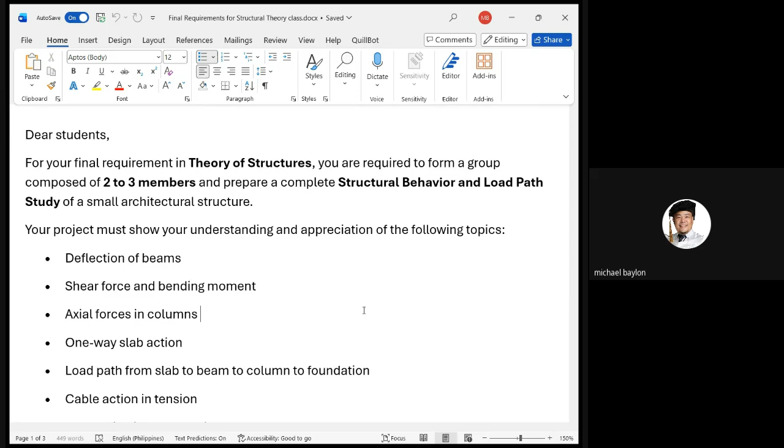Deflection of beams - we already have a formula on that, just substitute values there. Shear force and bending moment, axial forces in columns. By the way, shear force and bending moment are for the beams. The one-way slab action discussed to you in person. The load path from slab to beam to column to foundation, cable action in tension, and arch action in compression.

We will also cover the relationship between architectural form and structural behavior. You may propose a small pavilion, cafe, kiosk, gallery, waiting shed, covered walkway, small classroom, or any similar architectural structure.

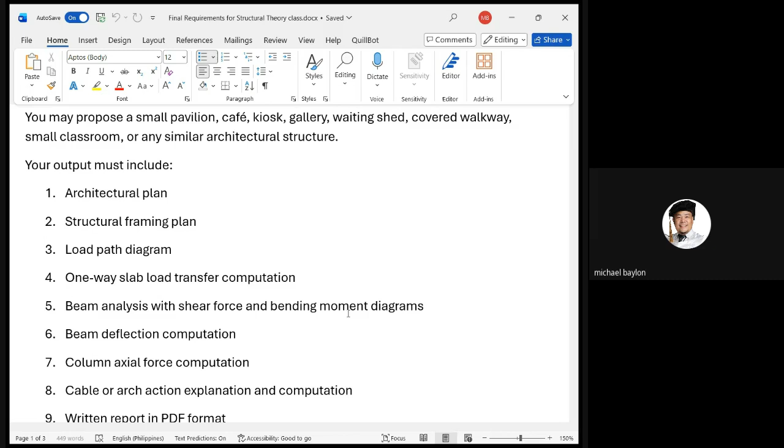Your output must include architectural plan, structural framing plan, the load path diagram, one-way slab load transfer computation, beam analysis with shear and bending moment diagrams, beam deflection computation, column axial force computation, cable or arch action explanation computation, written report in PDF format, and presentation slides for oral examination.

So the minimum would be 2 weeks to complete this requirement. That would be the minimum. If given a chance that you cannot finish that within 2 weeks, I can extend it. I asked the first class when will be the last day of their second semester. They told me it should be the first or second week of June. So you still have enough time.

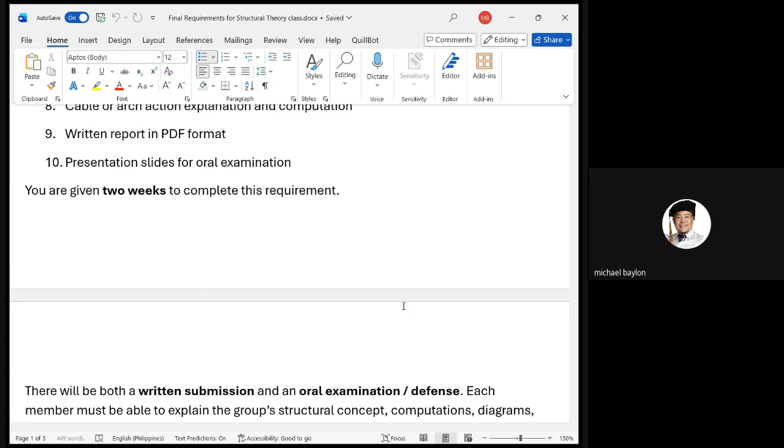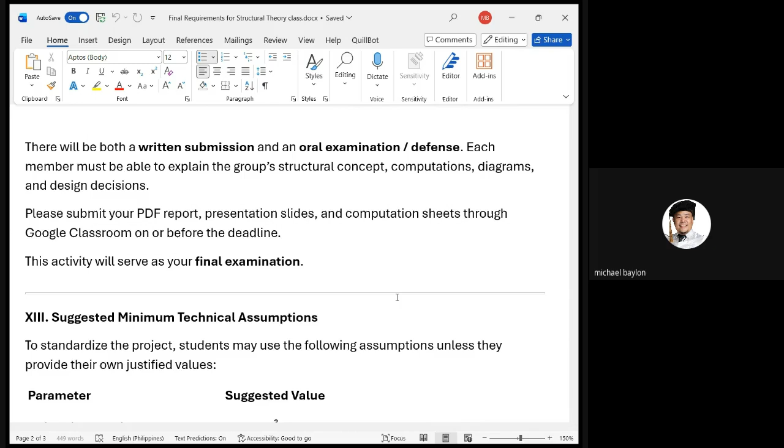So there will be both a written submission and oral examination or defense. Each member must be able to explain the group's structural concept, computations, diagrams, and design decisions. Kindly submit your PDF report, presentation slides, and computation sheets through Google Classroom on or before the deadline. This activity will serve as your final examination.

What happened? Oh no. Am I still sharing my slide? Is it correct? Yes sir.

Thank you. So, suggested minimum technical assumptions. In order to standardize the project, students may use the following assumptions unless they provide their own justified values. Some of them are arranged so you can choose among the upper, the median, or the lower bounds of the range.

For example, the unit weight of reinforced concrete is given already: 24 kilonewton per cubic meter. The floor finish load is 1 kilopascal. Half of that would be the ceiling or utilities load. Then you have the live load of 2 to 3 kilopascals, meaning it depends on the function of the room you're referring to.

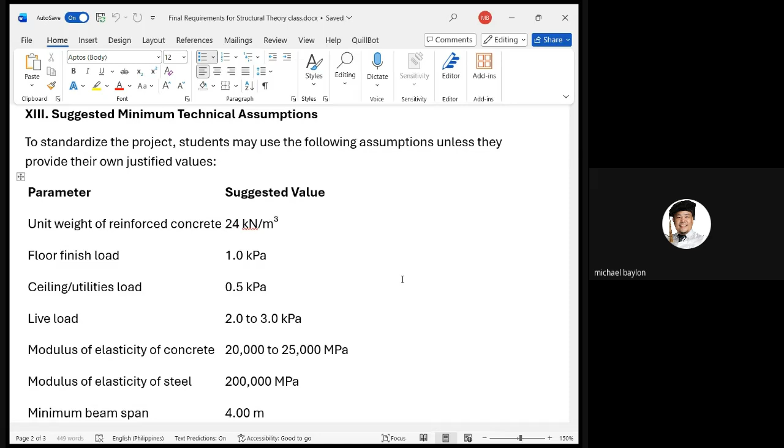The modulus of elasticity of concrete is around 20,000 to 25,000 megapascal. But the modulus of elasticity of steel is only one value, which is 200,000 megapascal, or 200 gigapascal. The minimum beam span is 4 meters, and the maximum suggested beam span is 6 meters. You don't go below 4, you don't go above 6 meters. So you have the range of the beam span from 4 meters to 6 meters.

Slab thickness is around 4 inches to 6 inches, or 100 millimeter to 150 millimeter. The beam width is from 200 to 300 mm, where the beam depth is from 300 to 500 mm. Column size is 250 by 250, which is the minimum for study purposes only.

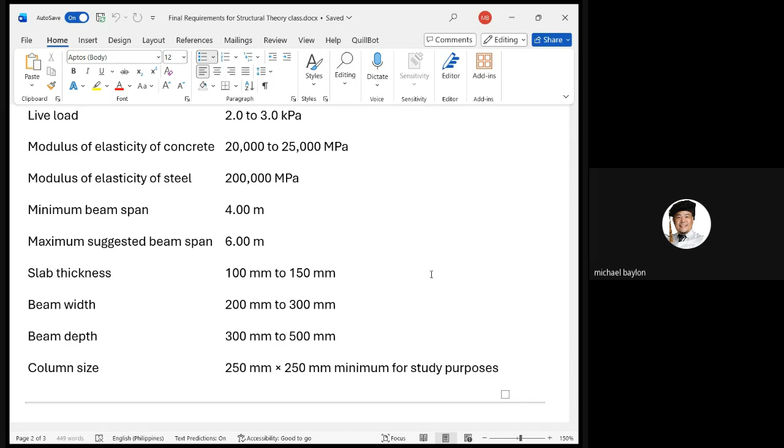Recommended final output quality: the final submission should look like a mini structural design portfolio. Mini lang yan, because if you're gonna have a real structural design portfolio, it would be thick in terms of number of pages, by practice.

It should not be a purely mathematical report since this is intended for architecture students. It's different from what we said, civil structural, because of what we're going to do. So only the appreciation, as mentioned, is appreciation. The output must show both the technical understanding - take note, understanding - and architectural appreciation.

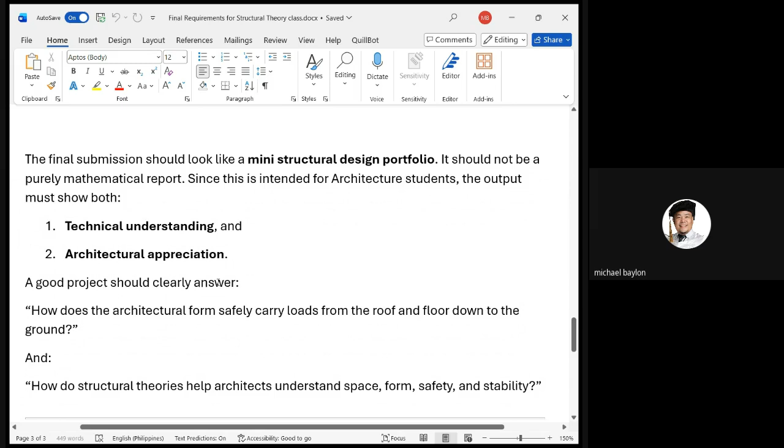A good project should clearly answer both questions: How does the architectural form safely carry loads from the roof and floor down to the ground? And how do structural theories help architects understand space, form, safety, and stability?

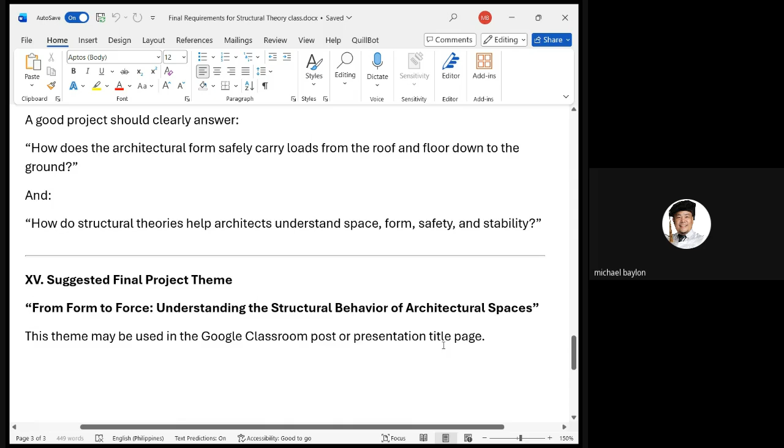So what are the suggested final project themes? From form to force, understanding the structural behavior of architectural spaces. This theme may be used in Google Classroom post and presentation. Yeah, I already put that.

Okay, next, I'm going to stop sharing and proceed to the other Microsoft Word document, which has more details. Okay, the details of our final project, final requirements project. But I had to see your faces first.

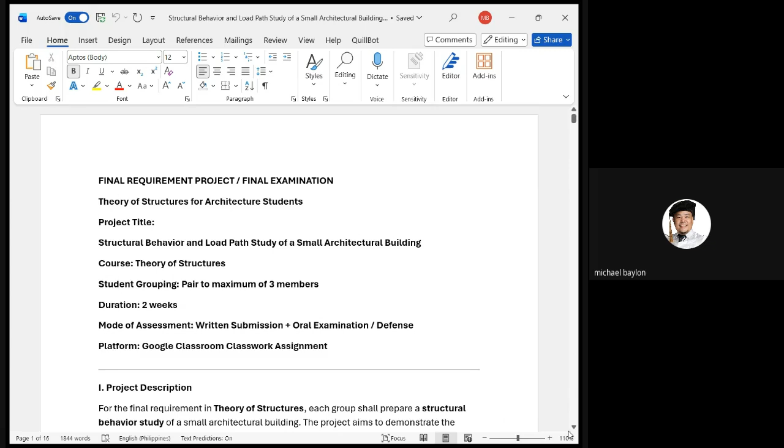Go with this one, structural behavior. Let me find the document. Okay, welcome back. So, final requirement project or final examination. This is already posted and attached to the Google Classroom assignment.

The project title: Structural Behavior and Load Path Study of a Small Architectural Building. Okay, so student grouping is a pair up to a maximum of 3 members.

By the way, may I ask the class president to come up with a Google Sheet wherein your classmates will upload the leader and the names of the members, and I will assign a unique group number. For example, group number 1 will consist of the leader and the names of the members.

So the duration is a minimum of 2 weeks, depending on how fast you can finish it. The mode of assessment would be two-fold: written submission and oral examination or defense, via Google Classroom classwork assignments platform. Of course, the oral examination will be face-to-face as much as possible.

For the project description, for the final requirement in structural theory, each group should prepare a structural behavior study for a small architectural building. The project aims to demonstrate the students' appreciation and technical understanding of how structures behave under gravity and lateral loads.

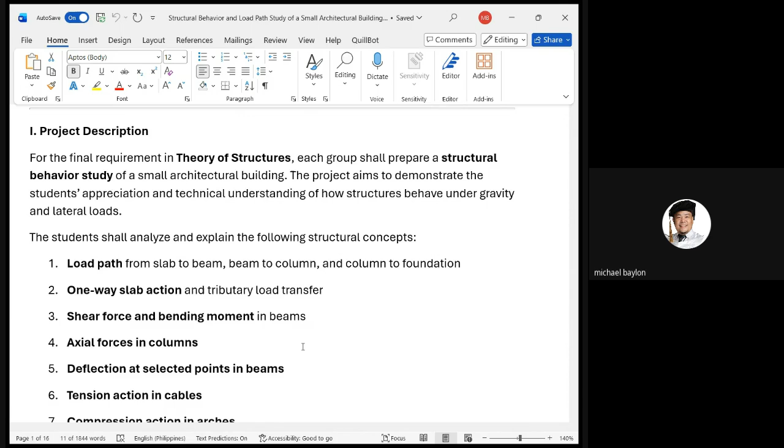Number two, one-way slab action and tributary load transfer. Three, shear force and bending moment in beams. Four, axial forces in columns. Five, deflection at selected points in beams. Six, tension action in cables. Seven, compression action in arches. And number eight, architectural implications of the structural system being studied.

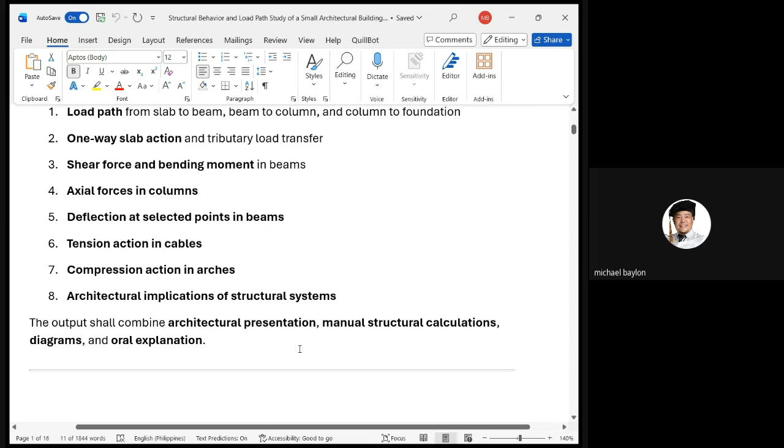The output shall combine architectural presentation, manual structural calculations, diagrams, and oral explanation. For the project scenario, each group shall design and analyze a simple architectural structure with the following minimum requirements.

The required building model: the group shall propose a small building or structure such as a small pavilion, cafe or kiosk, library reading area, waiting shed, gallery space, small classroom, covered walkway, open hall, small residential-inspired structure, or architectural canopy structure. The proposed structure must include the following.

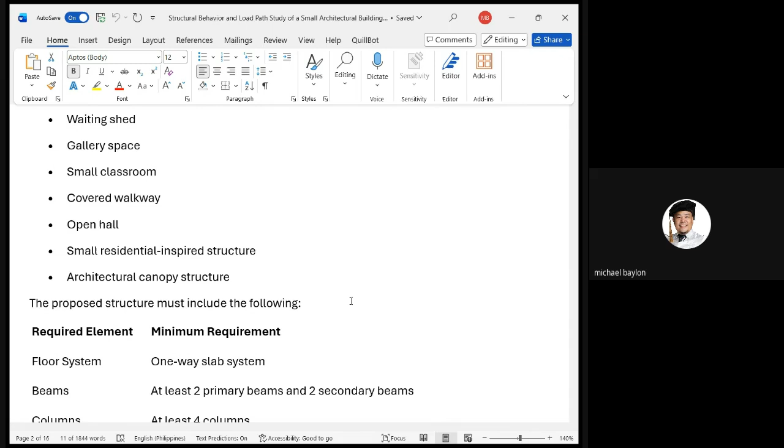You have the first column for the required element and the minimum requirement in the second column. Floor system should have a minimum requirement of a one-way slab system. The beams: at least two primary beams and two secondary beams. Columns: at least four columns to complete the structure, connected together. For the roof feature, either a cable-supported roof or an arch-supported roof, or both.

Structural span: at least one beam span of 4 to 6 meters. Building level: only a one-story structure. Just one story, like a bungalow. Structural material can be reinforced concrete, steel, timber or wood, or a reasonable combination of the three.

Excuse me. Architectural drawing: plan, elevation, and section.

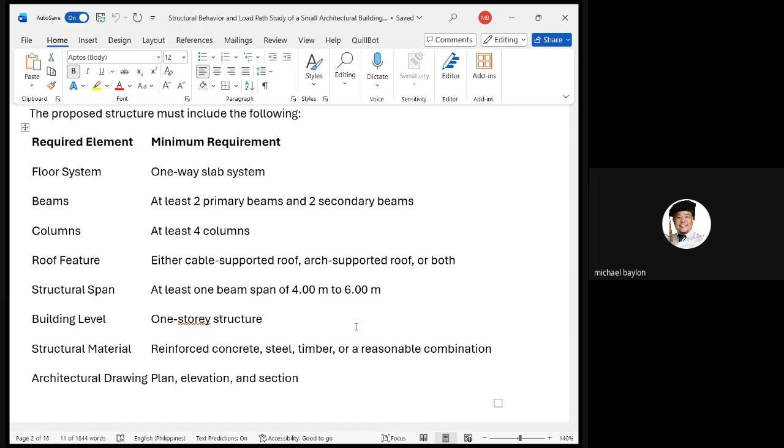For the required technical tasks, there are different parts. Part A, architectural and structural concept. Each group shall submit the following: 1, architectural floor plan; 2, structural framing plan; 3, elevation; 4, section; and 5, structural concept explanation. The drawings may be prepared...

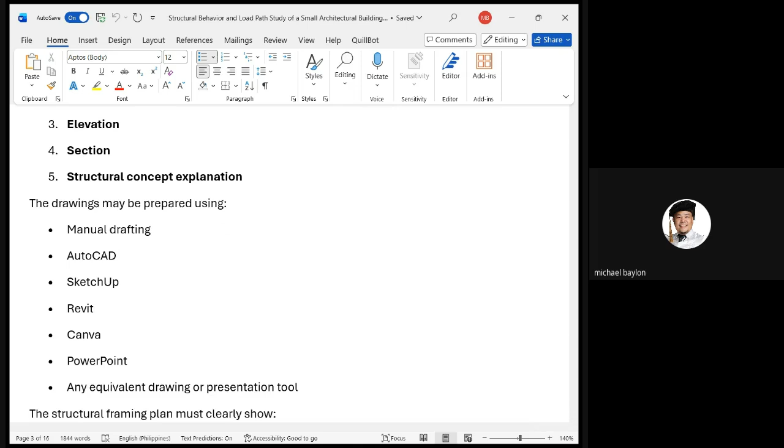Yeah. The structural framing plan must clearly show: 1, the slab direction, the beam locations, column locations, load path arrows, tributary areas, structural grid lines, and support conditions. Wait, there's more below.

Part B, the load path analysis. For Part B, the group shall explain and compute the load transfer from the slab to beam, beam to column, column to foundation. Then the following must be included: number 1, the slab.

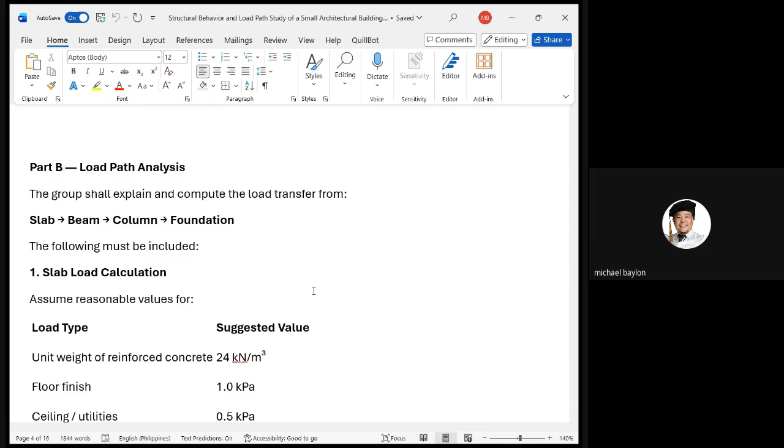The slab calculation will assume reasonable values for the load type. The unit weight of reinforced concrete is 24 kilonewton per cubic meter. For floor finish, it's 1 kilopascal. For ceiling utilities, 0.5 kilopascal. Live load is between 2 to 3.0 kilopascal. Actually, 3 kilopascal is for storage, that's how heavy it is.

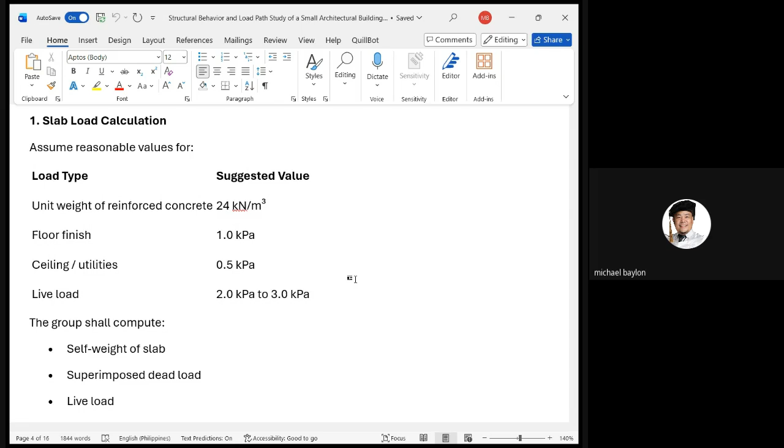The group shall compute the self-weight of the slab, the superimposed dead load, live load, total service load, tributary width, and line load transferred to the beam. We have examples for this.

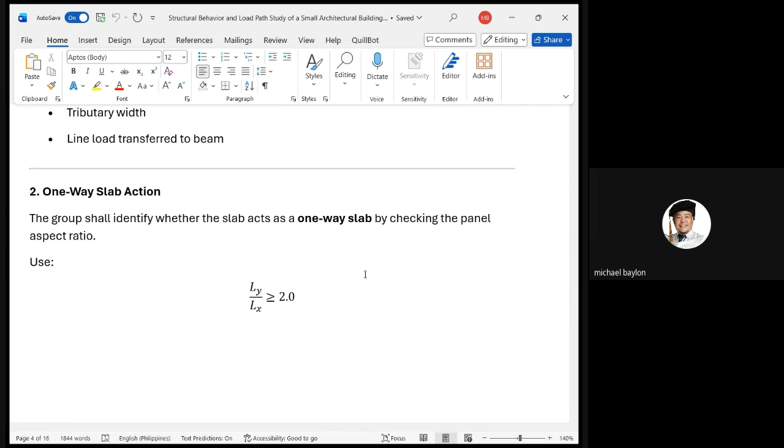For the one-way slab action, the group shall identify whether the slab acts as a one-way slab by checking the panel aspect ratio. The Ly over Lx should be greater than or equal to 2.0. Ly is the longer span and Lx is the shorter span.

Now the group shall draw arrows showing the direction of slab load transfer. This is what we demonstrated last time we met. Since I care about you, I made an example report and also the PowerPoint presentation.

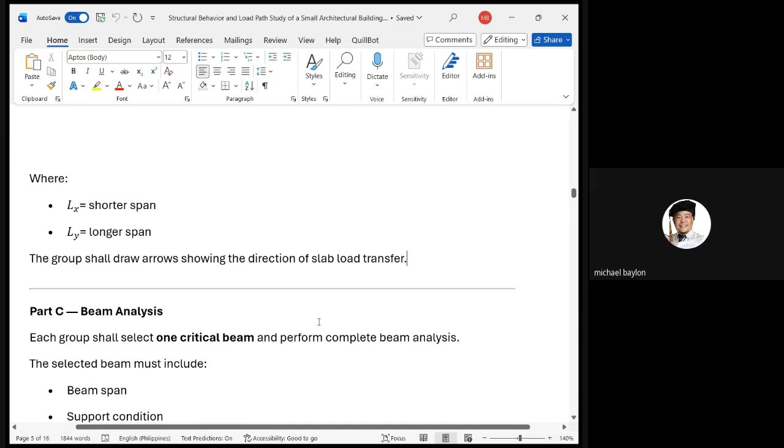So let's proceed to our Microsoft Word report. Are you done with the Ly over Lx? Now for beam analysis.

Each group shall select one critical beam and perform complete beam analysis.

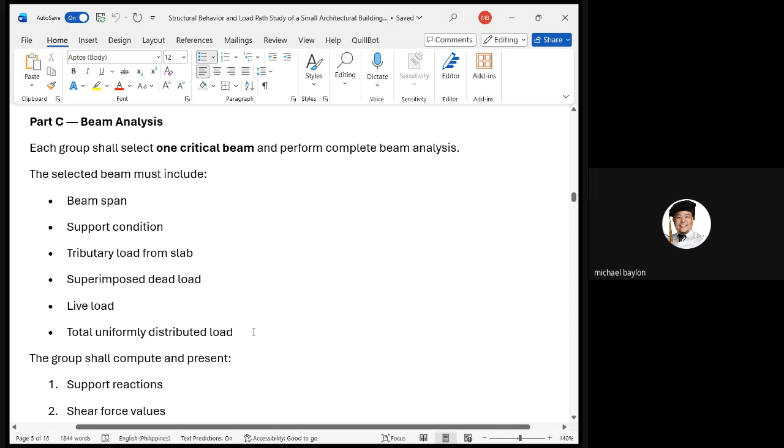Now the group shall compute and present: support reactions, this is the statics of rigid bodies part, shear force values, bending moment values, maximum shear force, maximum bending moment, shear force diagram, bending moment diagram, and deflection at midspan or any selected point.

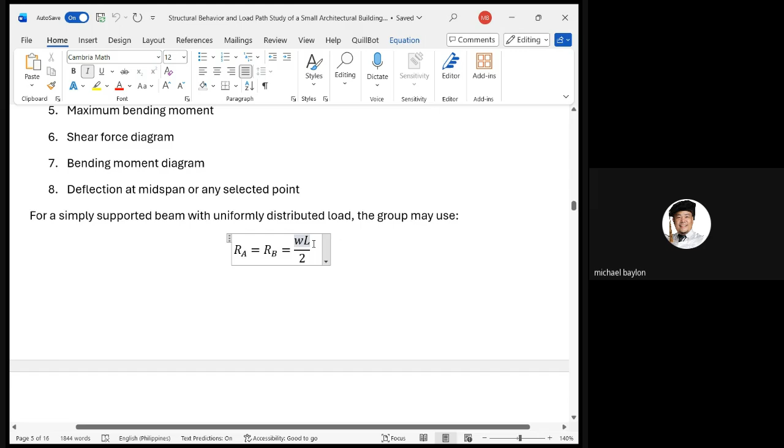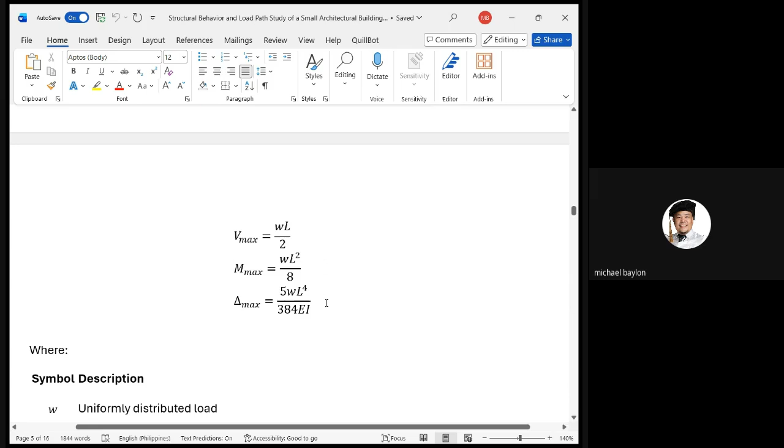The left is point A, and point B is the other reaction. For uniformly distributed load, multiply by the span and divide by 2, that's the reaction at the ends. The maximum shear is also at both ends, that's the reaction value. The maximum moment has already been computed for you as WL squared over 8, just substitute the values. Then delta maximum equals 5 over 384 times WL to the fourth over EI.

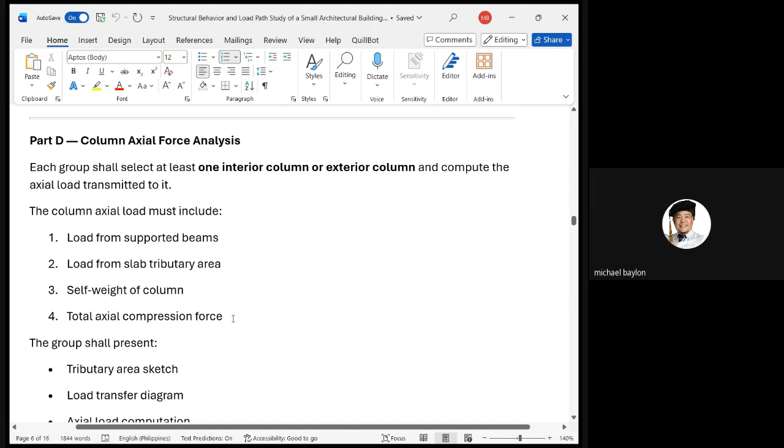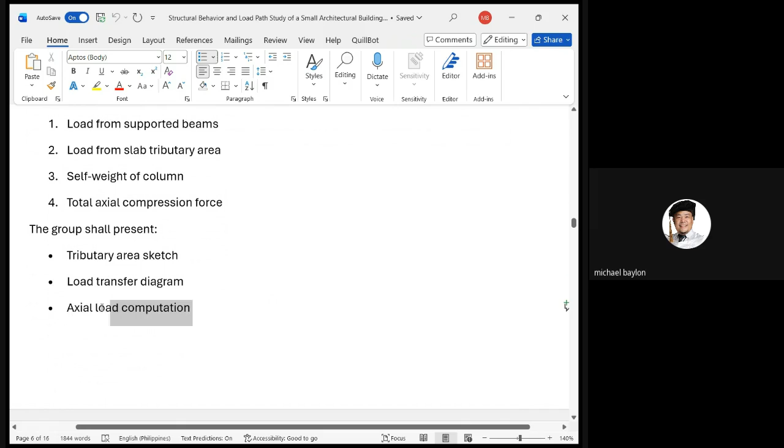The group shall present the tributary area sketch. We'll see an example of that. Also include the load transfer formula, load transfer diagram, axial load computation, and explanation of compression behavior in columns.

I think this is the last part, Part E, cable or arch structural action. Each group shall include either option 1, cable-supported roof or canopy.

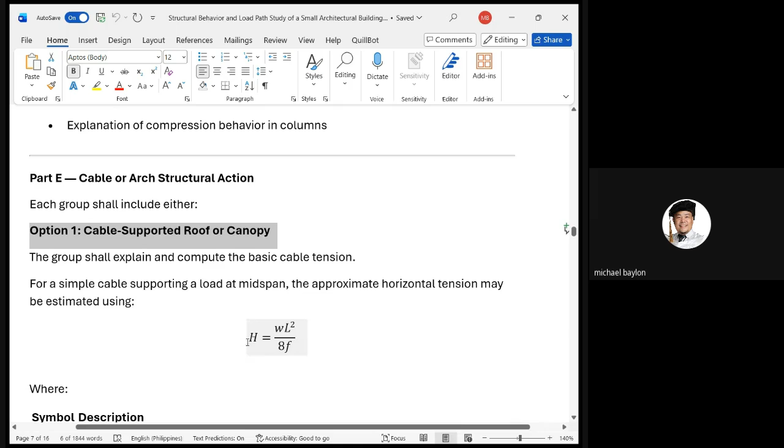The group shall explain and compute the basic cable tension. For a simple cable supporting a load at midspan, the approximate horizontal tension may be estimated using horizontal force reaction equal to wL squared over 8f, where f is the sag of the cable.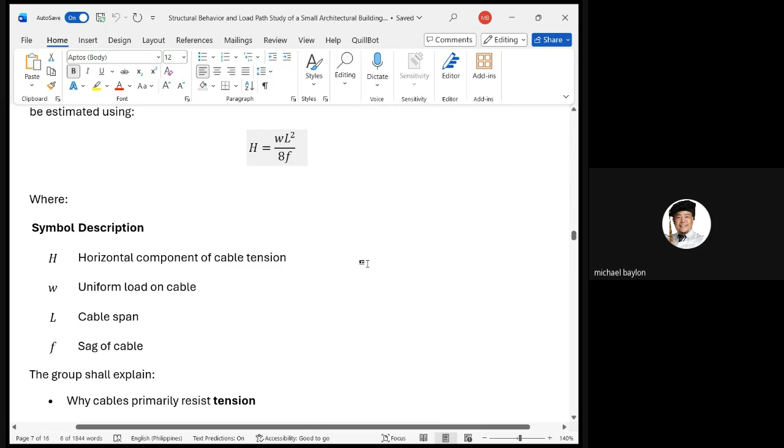The group shall explain why cables primarily resist tension, which is opposite that of arches, which resist compression; why the cable shape changes depending on loading; how the cable transfers force to the supports, which are our anchorages; and the architectural advantages of cable-supported systems.

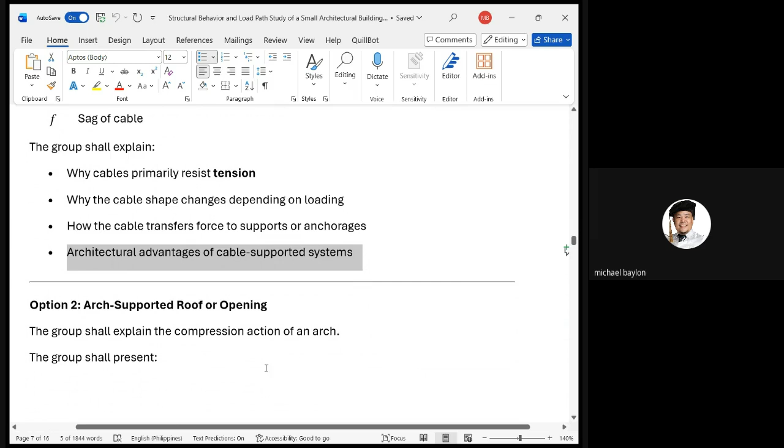For option 2, arch-supported roof or opening, the group shall explain the compression action of an arch, and present the geometry of the arch, loads acting on the arch, the compression thrust line concept, the horizontal thrust at supports, and an explanation of why arches work best in compression.

For a simple 3-hinge parabolic arch under uniform load, the horizontal thrust may be approximated as the horizontal reaction at the support at the base of the arch: WL squared over 8H, where H is the rise of the arch.

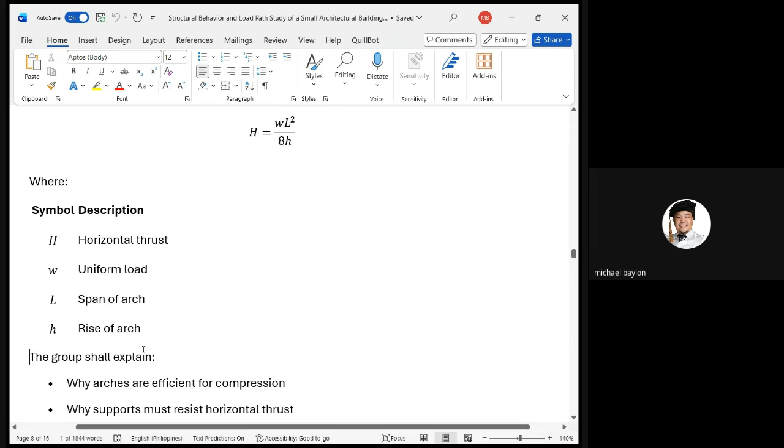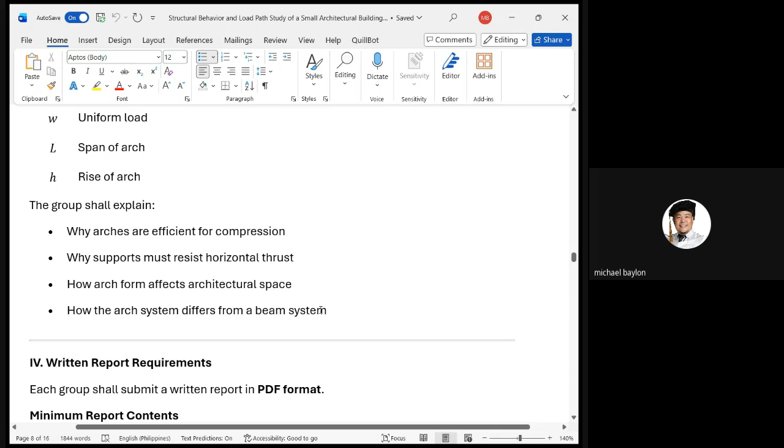Number 4, the written report requirements. Each group shall submit a written report in PDF format.

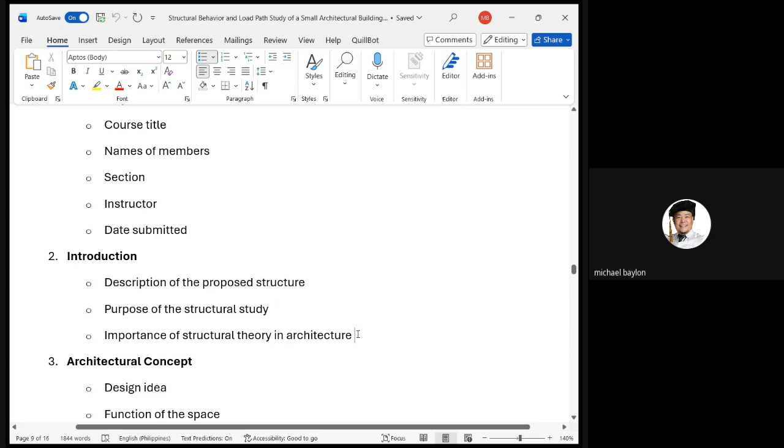Dr. Michael Baylon, your humble professor, and the date submitted—2 to 3 weeks from now. Then the introduction: description of the proposed structure, purpose of the structural study, and importance of structural theory in architecture.

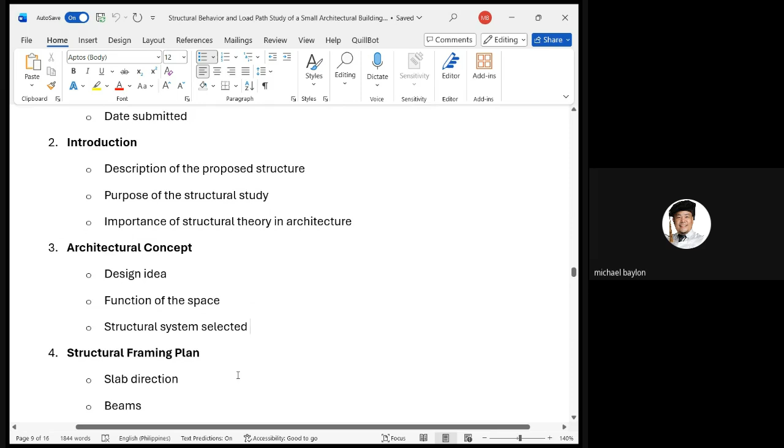For the introduction—description of proposed structure, purpose of the structural study, importance of structural theory in architecture, and architectural concept: what is the idea of your design or design idea? Function of the space and the structural system selected—what will you use? I'll give an example of that later.

Structural framing plan—you should know this already: slab direction, the cross-section, so you can have a schedule of beams, columns, and slabs. What does the cross-section look like, the sizes, how much rebar you'll place. Also the cable or arch feature and the load path arrows.

Number 5, the load path analysis: slab load computation, tributary area, load transfer from slab to beam to column, and column to foundation transfer.

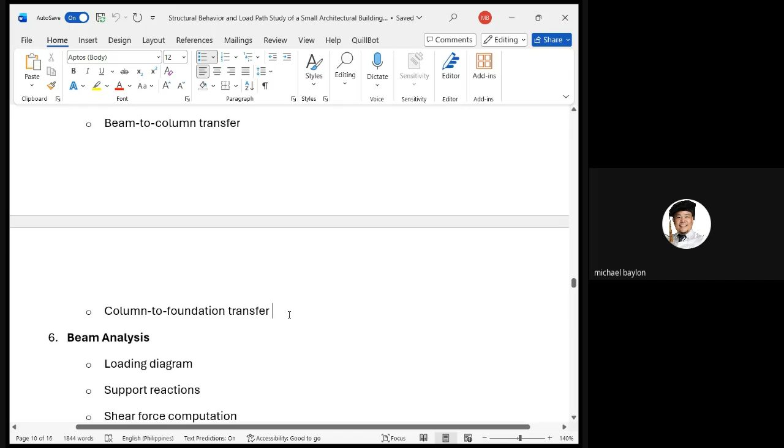Number 6, beam analysis: the loading diagram, support reactions, shear force computation, bending moment computation, deflection computation, shear force diagram, and bending moment diagram. All of that is itemized.

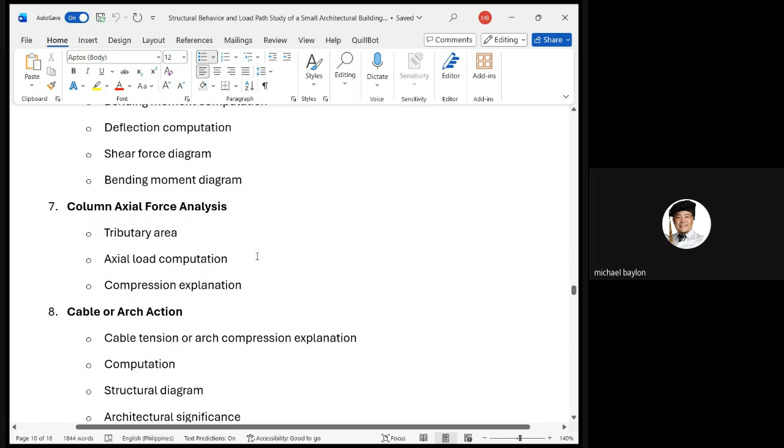Column axial force analysis, tributary area, axial load computation, and compression explanation.

Number 8, cable or arch action, cable tension or arch compression explanation, computation, structural diagram, and architectural significance.

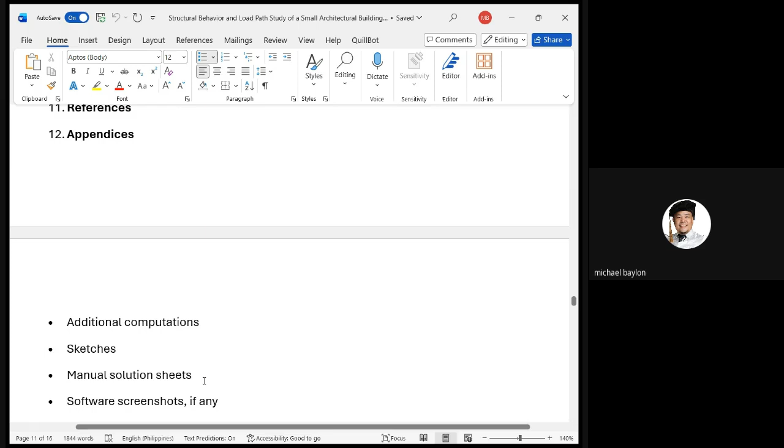Okay. And lastly, software screenshots, if any.

Required drawings and diagrams. The final report must include the following drawings.

Required, all of that. Architectural floor plan.

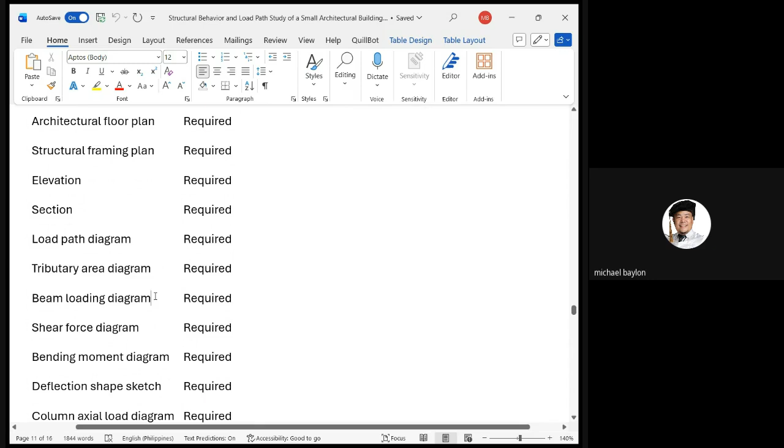Then, oral examination defense.

Each group shall present and defend their final requirement.

Presentation duration activity.

Group presentations for 10 minutes and question and answers 5 to 10 minutes.

A total of 15 to 20 minutes per group.

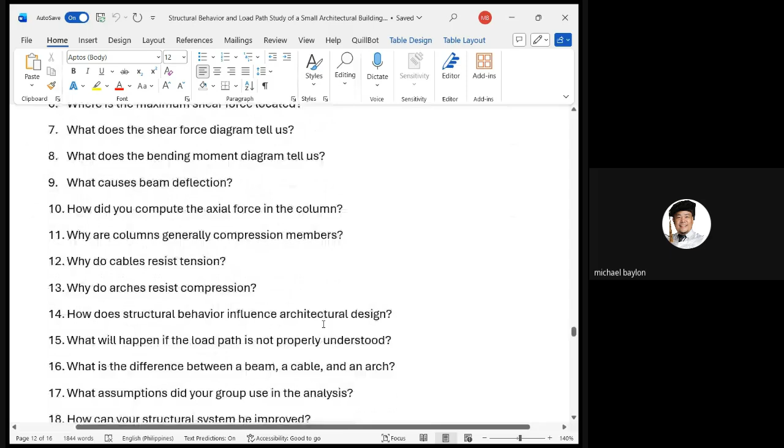1 to 20 possible questions.

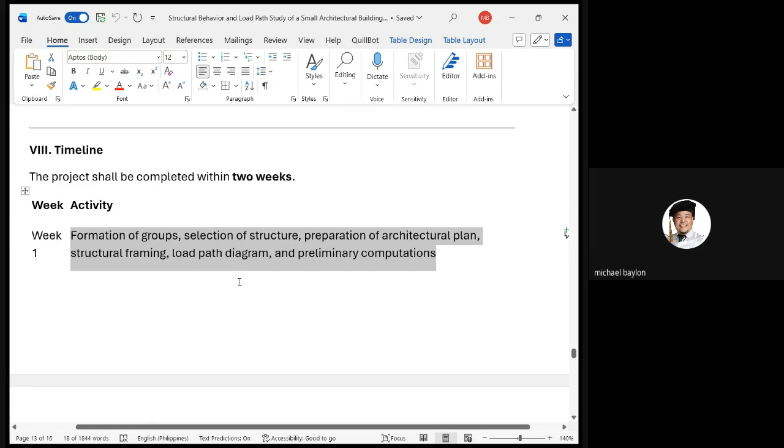Okay, at the end of our period.

For week 2, we have completion of beam analysis, column axial analysis, cable arch action, report writing, presentation preparation, and/or preparation for oral defense.

Okay, these are the criteria. They have equivalent points, so it's not just pulled from anywhere.

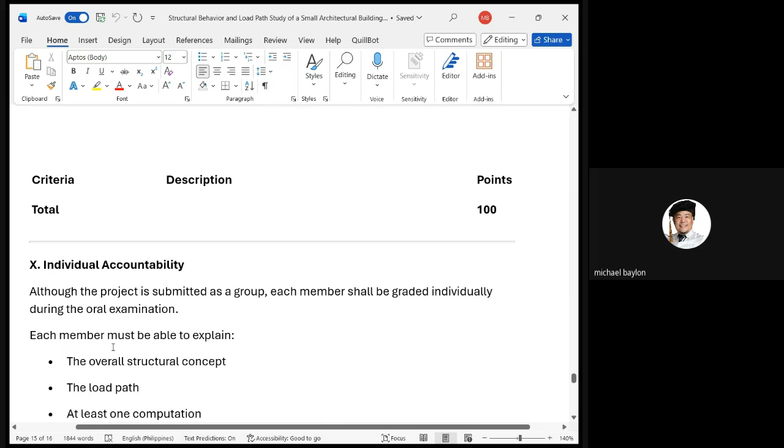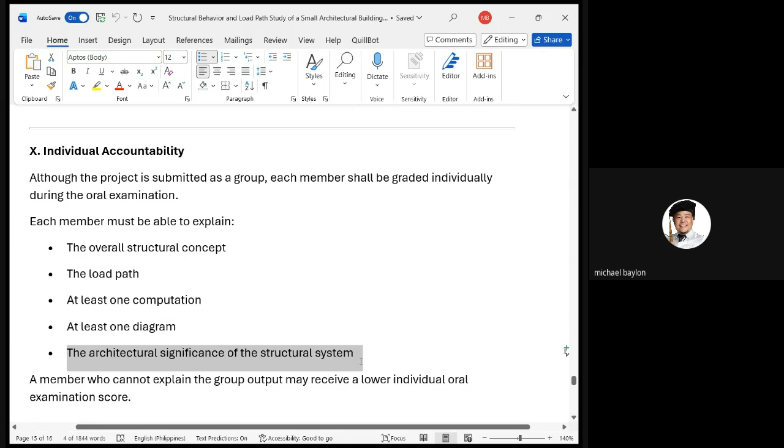Individual accountability: although the project is submitted as a group, each member should be graded individually during the oral examination. Each member must be able to explain the overall output, structural concept, load path, at least one computation, and at least one diagram, and the architectural significance of the structural system. A member who cannot explain the group output may receive a lower individual oral examination score, but it will not affect the group grade.

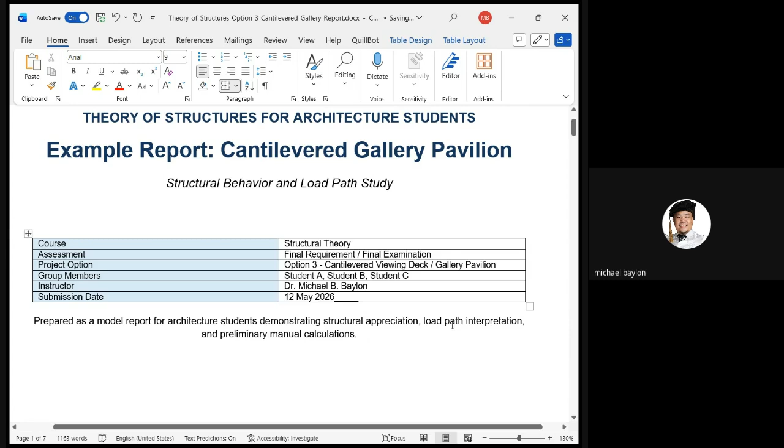Prepared as a model report for architecture students demonstrating structural appreciation, load path interpretation, and preliminary manual calculation. That's just a memo.

Introduction: this report presents a model final project submission for a one-story architecture gallery pavilion with a cantilevered viewing deck, or terrace in Tagalog. The study highlights one-way slab load transfer, beam shear and bending, fixed end moment, negative bending, deflection at the free end, column axial load, and architectural implications of the cantilevered form. That's his summary of what he did here.

Description of the proposed structure, item number 2. The first column lists items such as main supported bay, cantilevered projection, number of stories, primary system, architectural feature, and function. For the values, the main supported bay is 6 by 5.

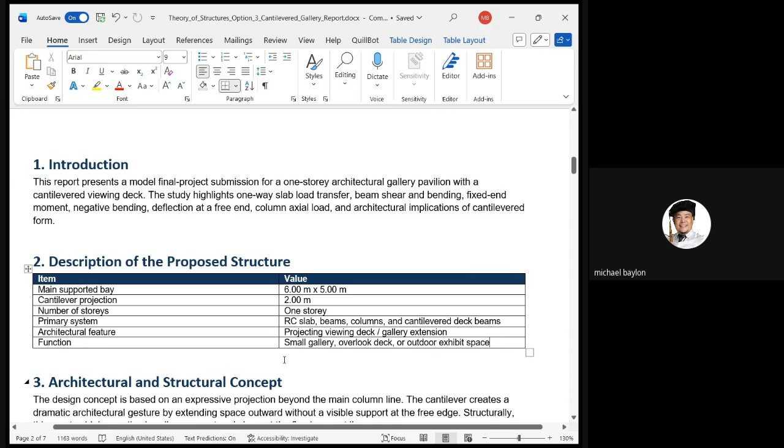Number 3, architectural and structural concept. The design concept is based on an expressive projection beyond the main column line. The cantilever creates a dramatic architectural gesture by extending space outward without visible support at the free edge. Structurally, this creates high negative bending moment and shear at the fixed support line. It sounds true, right? But that's just describing what's happening in item number 3.

So this is now the drawing, as you can see: structural framing plan with cantilever viewing deck. There's the viewing deck, this is 2 meters, and this side is 6 meters, but it's only one story.

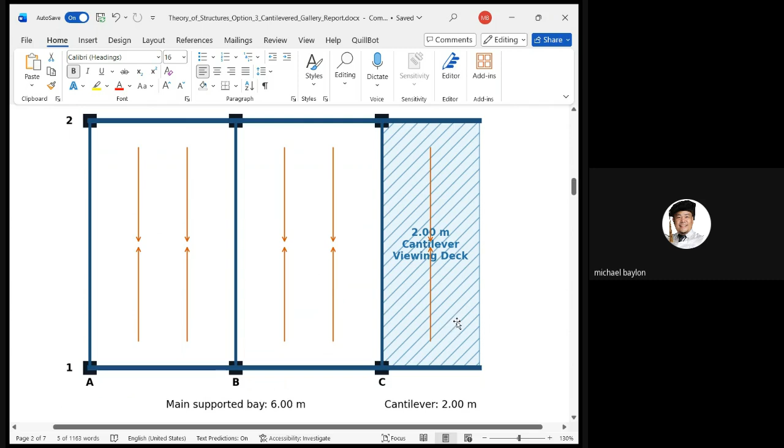And then this is the elevation and section, showing the load path and deformation of the cantilever viewing deck. Here we can see the free edge. It was mentioned that there's fixed-end negative moment and shear demand at the support line. This is the post and the cantilever beam; it will just deflect like that. So cantilever deflection is maximum at the free end, and this is the uniformly distributed load, with the flooring here, what they call the free edge.

Viewing deck. Of course, if there's a roof deck there should also be a parapet wall, so that's additional load if you have that.

Section showing fixed-end action, free end deflection, and cantilever load path. Load path analysis: the main supported bay transfers load from slab to beams, beams to columns, and columns to foundations. The cantilever deck transfers load toward the fixed support line.

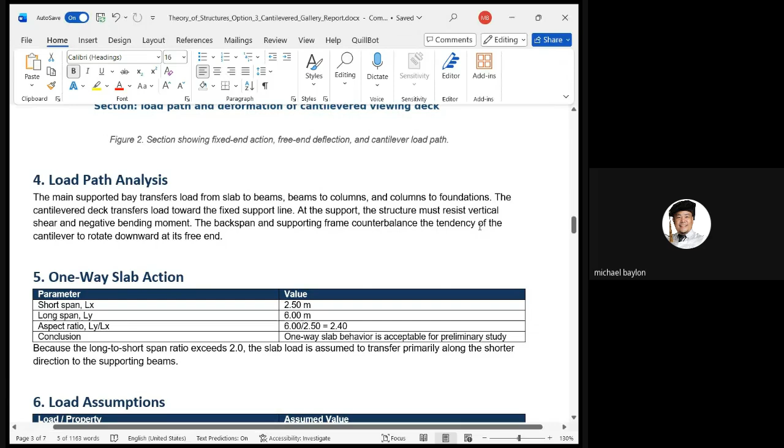At the support, the structure must resist vertical shear and negative bending moment - that's the support near the cantilever. The backspan and the supporting frame counterbalance the tendency of the cantilever to rotate downward at its free end.

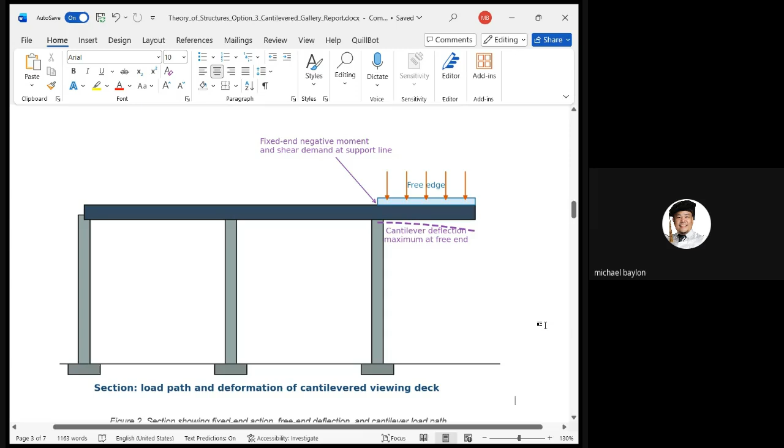So you may consider also the drawing of the deflected or elastic curve of your beams.

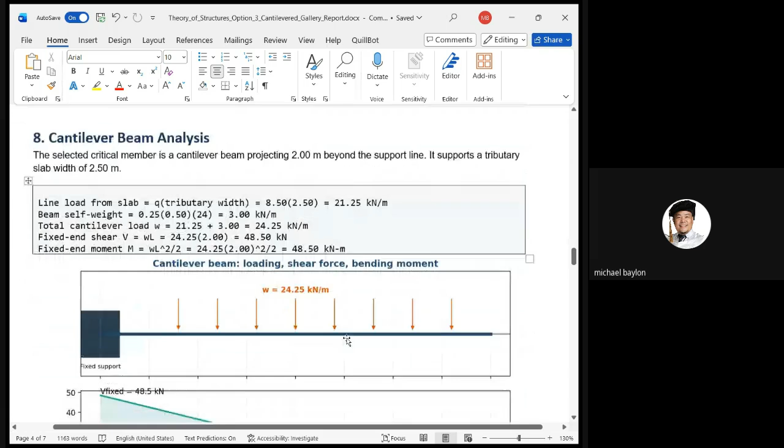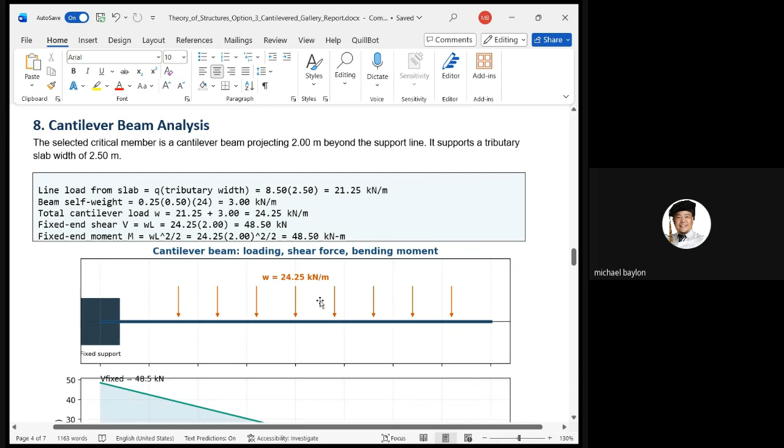Cantilever beam analysis, here it is - this is the cantilever. A total of 24.25 kilonewton per meter. Then we computed the maximum shear at the support, and maximum moment there too at the support, maximum negative.

Cantilever deflection analysis - here it is, moment of inertia is BH cubed over 12, depending on the size of our beam. Then you have the free end deflection.

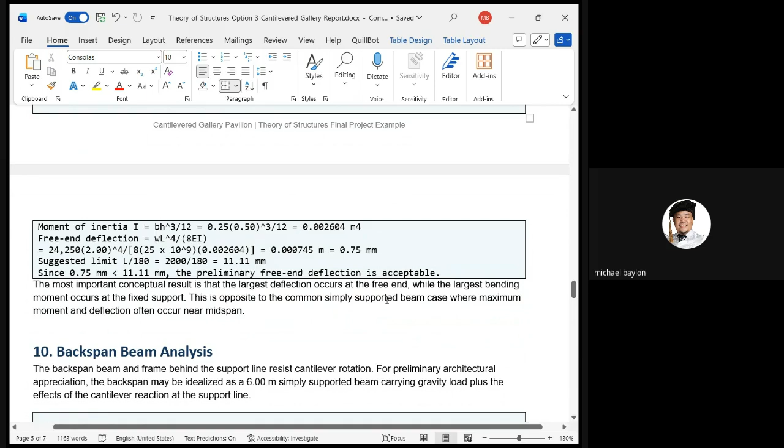So the most important conceptual result is that the largest deflection occurs at the free end, while the largest moment occurs at the fixed support. This is opposite to the common simply supported beam case, where maximum moment and deflection often occur near the midspan - because for us, it's the free end, since it's a cantilever.

For the backspan beam analysis, behind the support line, it resists rotation. For preliminary architectural appreciation, the backspan may be idealized as a 6-meter simply supported beam carrying gravity load plus the effects of the cantilever reaction at the supports.

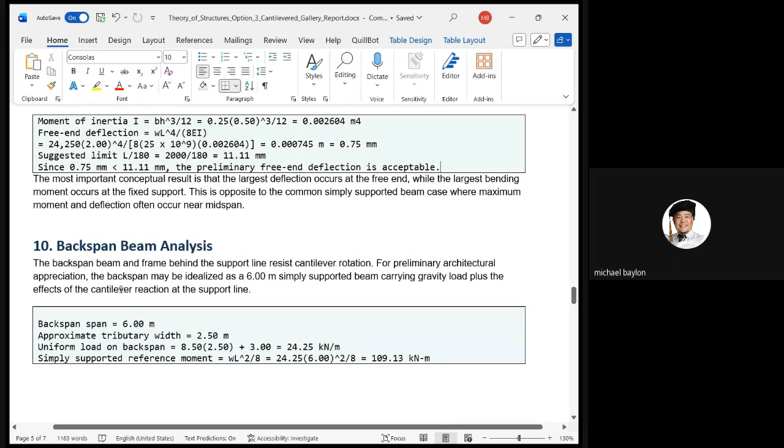So there it is - backspan is 6 meters, approximate tributary width is 2.5, half of that. Then, uniform load of the backspan and simply supported reference.

This one is the column axial force analysis - the column and tributary area method for axial load estimates. Most likely you have to select the interior column because that gets more load due to the tributary area, half of this side, half of that side.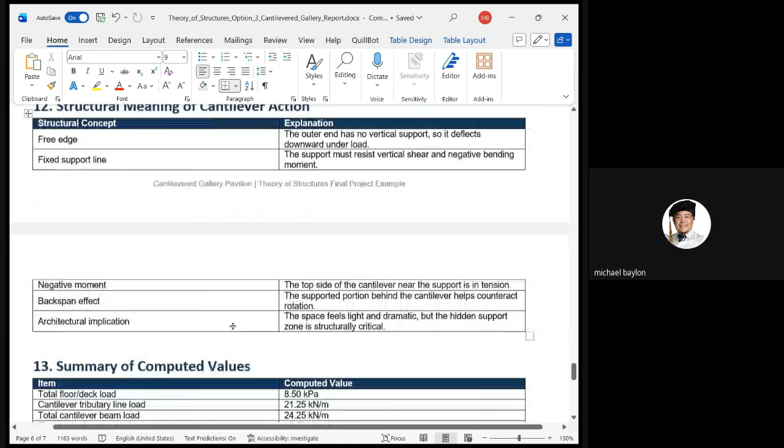That's for the columns. Then number 12, structural meaning of the cantilever action - we have to explain the edge, the fixed support. Explain the negative moment, backspan effect, and architectural implications. Summary of computed values, you have to put it here.

For the structural reflection, you will write that. The cantilever option teaches architectural drama - it's meaningful - and is often accompanied by concentrated structural demand.

The free end projection appears visually simple, but the fixed support line must resist moment, shear, and rotation. So the designer must respect the hidden structural requirements behind the expressive architectural form - imagine that, there's something hidden that should be revealed.

Conclusion: the cantilevered gallery pavilion demonstrates one-way slab behavior, beam action, column compression, and cantilever mechanics. It shows that the location of maximum force effect depends strongly on support condition. For example, in a cantilever, the support line is the critical region for negative moment and shear, while the free end is critical for deflection perception.

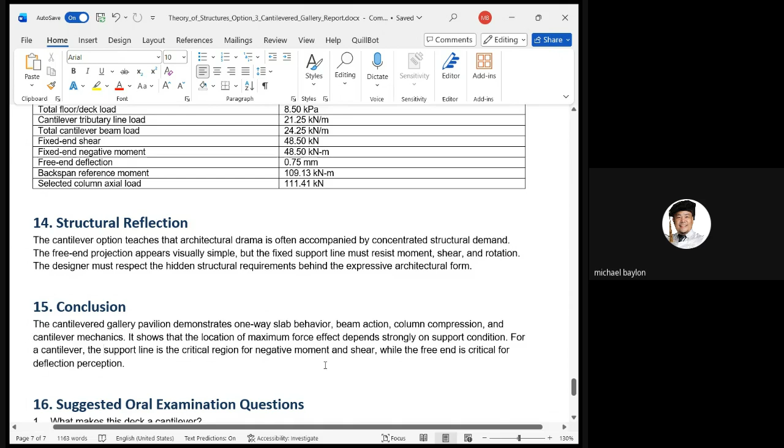Some suggested oral examination questions you have to answer are there. Then references - why did it continue from 6 to 7?

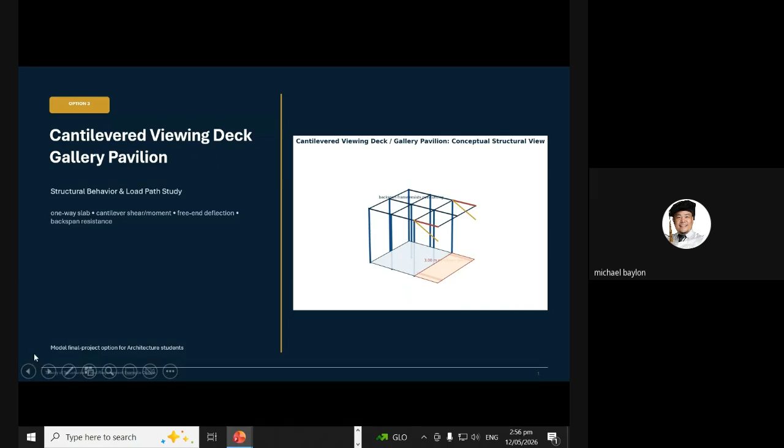Structural behavior and load path study. One-way slab, cantilever shear moment, free-end deflection, backspan main resistance. Okay, this is a model final project option for architecture students.

So this is the project concept: a cantilevered gallery pavilion, a one-story viewing deck where the architectural projection becomes a structural lesson. Conceptual structural design.

You have the backspan and the cantilever - that's our backspan here. Supposedly there's a post there, it's not floating, there's a post. Cantilever is 3 meters, width is 4 meters, and story height is 3.2 meters.

Design idea: projecting space. The deck creates architectural drama, but the fixed support must resist negative moments and overturning. Okay, this is the framing plan and projection zone for the cantilevered gallery pavilion.

Okay, the arrow pertains to this cantilever projection, at the end. So there's a post in this part, and then you have also the beams. So: back span frame, cantilever zone, negative moment design region, and deflection control.

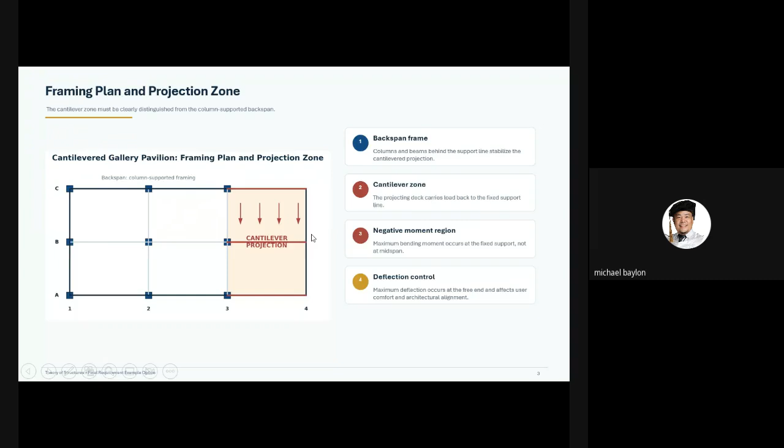Load path and structural action: Cantilever pavilion load path, negative moment, and backspan resistance. The cantilever load travels backward to the fixed support line rather than directly downward at the free end. The backspan and support columns resist negative bending moment, shear, and overturning effects.

They only took this one space, but there should be one here too. Okay, architectural lessons: a floating edge requires an invisible force couple inside the structural system.

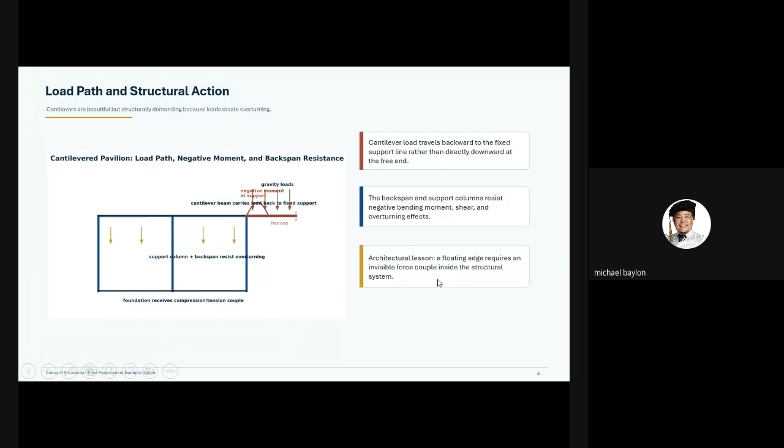Then cantilever beam analysis, shear and moment - uniformly distributed load. That is the total, 8 kilonewton per meter. Cantilever beam model load, shear and moment.

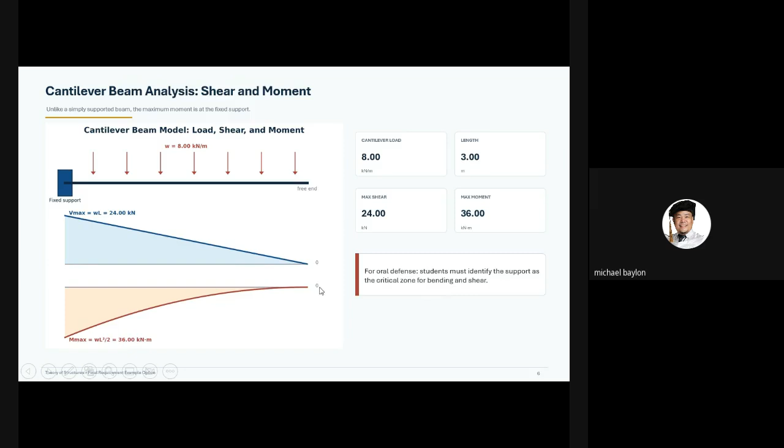So then you must identify the support as the critical zone for bending and shear, which is really the cantilever. How about this one? This is the cantilever deflection, serviceability, and visual alignment.

Here, we got 2.47 - I think this is corrected now. The allowable is 11.11 millimeters, this is 2.47. Anyway, so this is the deformed shape and that is the fixed support - quite broad, this should be the fixed support.

Excessive free end deflection can cause cracking, ponding issues, glass misalignment - that's for the glass we place up top - and uncomfortable perception of movement. You can easily get dizzy because the cantilever beam vibrates.

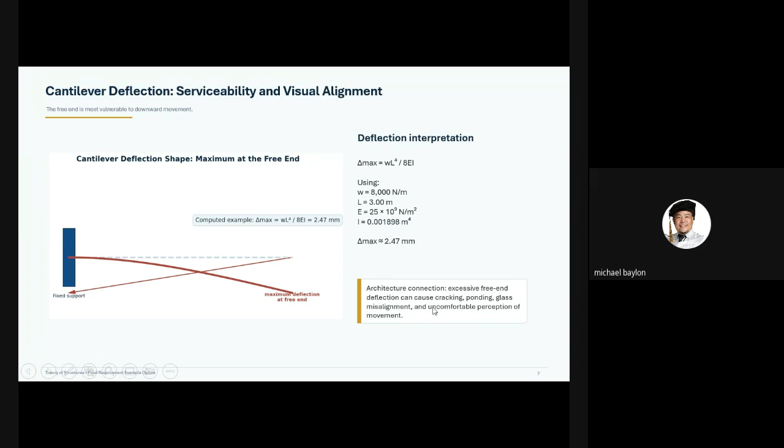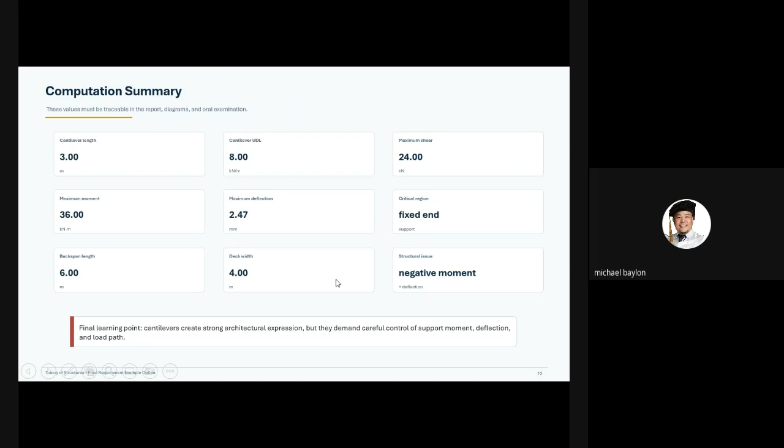So architectural meaning, oral defense focus - these are the questions, expected answers, and here: computation summary, which is part of your conclusion, supposedly.